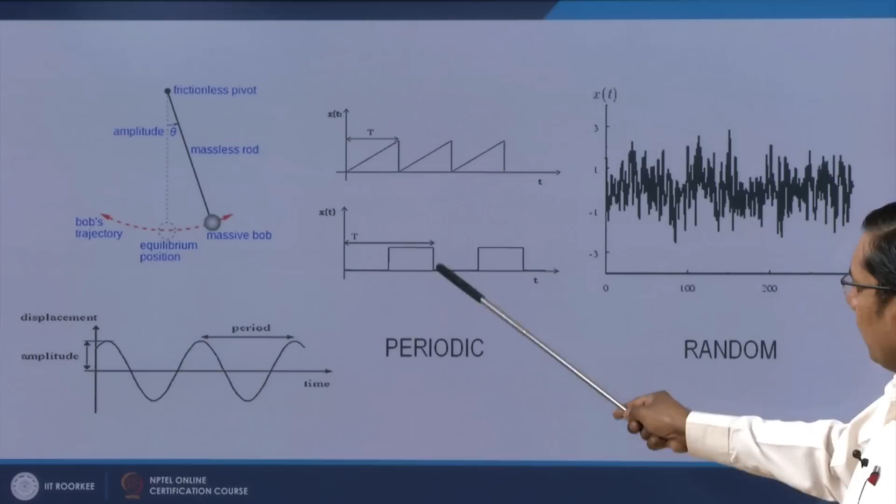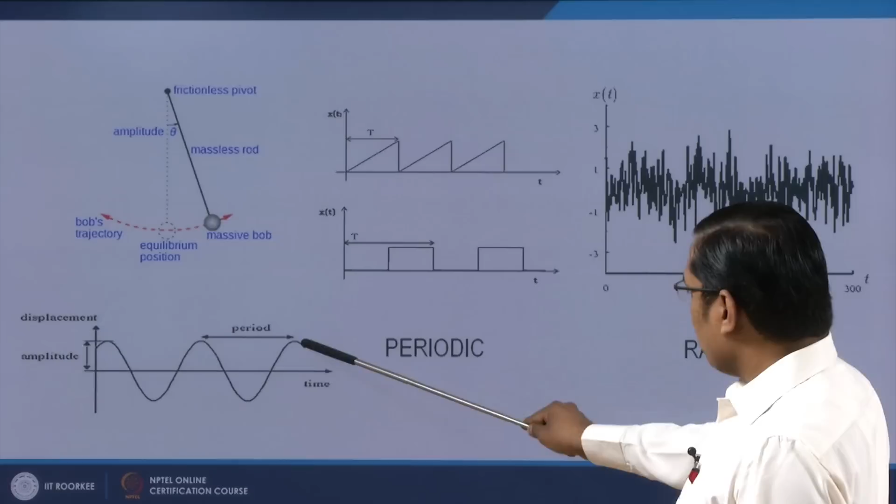Similarly, this motion repeats after a fixed time, so it is also periodic. Similarly, here we have a repetition of this wave profile, it repeats from here and then again starts repeating its motion. So these are periodic, but if you see this motion, there is no fixed time interval when it will repeat itself.

It is random motion. For example, there is wind forces, and therefore the vibration of a tower due to these wind forces. So these are random vibration signals.

Now the next question is, why does a mechanical system vibrate? Why is there vibration of mechanical systems? Why don't they stay static? As we know, every mechanical system has some mass and stiffness. Any system that has mass and stiffness is prone to vibrations.

Moreover, mechanical systems are subjected to external forces as well as forces generated inside the system. For example, if there is an internal combustion engine, there are unbalanced forces generated inside the system, and due to the effect of those forces, the system will vibrate.

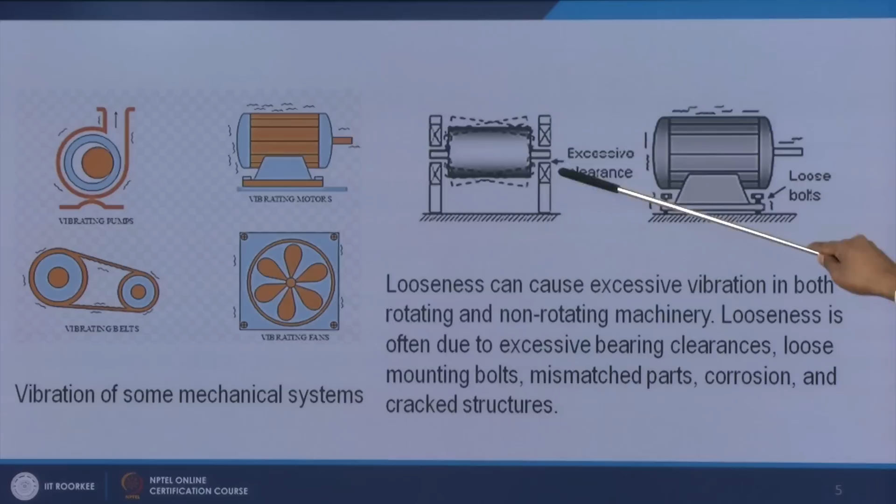In mechanical systems, there is some looseness because there are connections between members, and when there are weak or loose connections, that can be a cause of vibrations. For example, here we can see some clearance between the bearings and the shaft. If there is more clearance, or the bolts supporting this motor that connect it to the support are loose or have more clearance, there will be more vibrations.

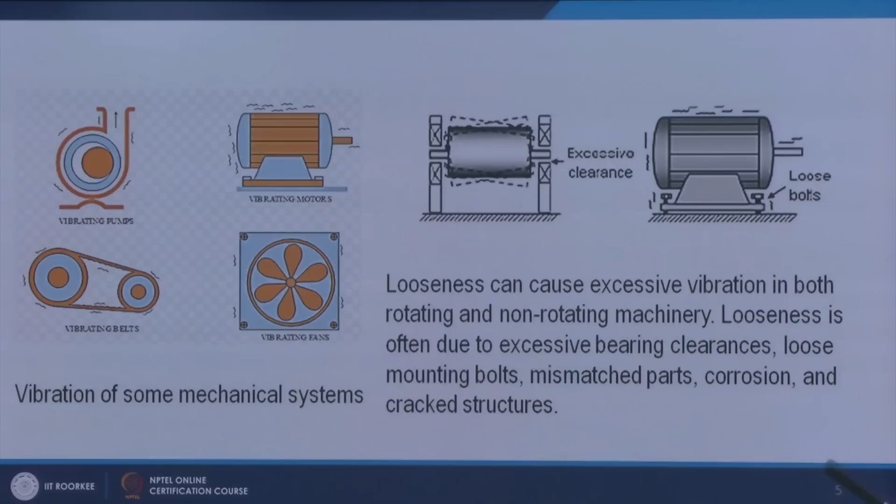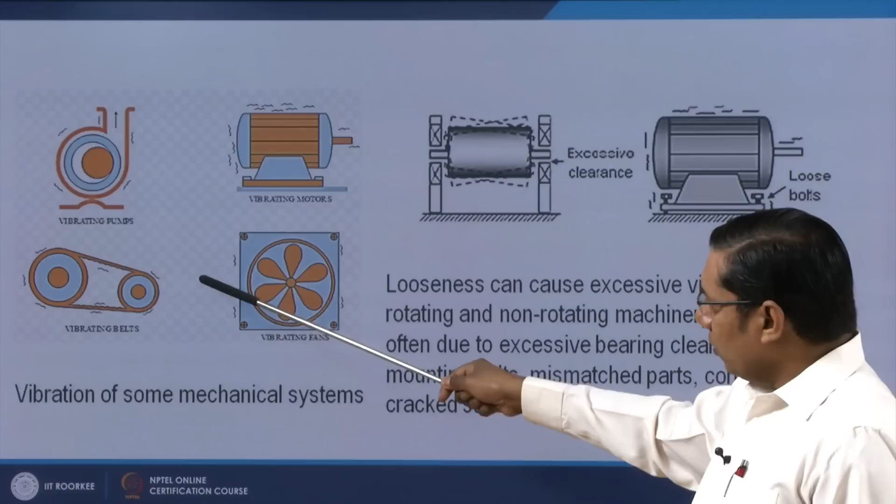And these are some mechanical systems like vibrating pumps, vibrating motors, the belt and pulley drive, then vibrating fans. So these rotary systems, they may have some eccentric masses, some unbalanced masses, and due to that unbalance, they may have some vibrations.

So what is the effect of vibration? Now we have defined vibration, we have defined the causes of vibration. Now we have to know what is the effect of vibration. The effect is positive or negative.

So in general, mechanical systems, in several applications, we avoid or we don't want vibrations. For example, if we are in a train, we are in automobiles, we are in a bus, we don't want vibrations because the vibration causes discomfort to the passengers.

If we have some turbines where there are blades and rotors, the vibration can cause fatigue and failure of the turbine blades, turbine rotors, components.

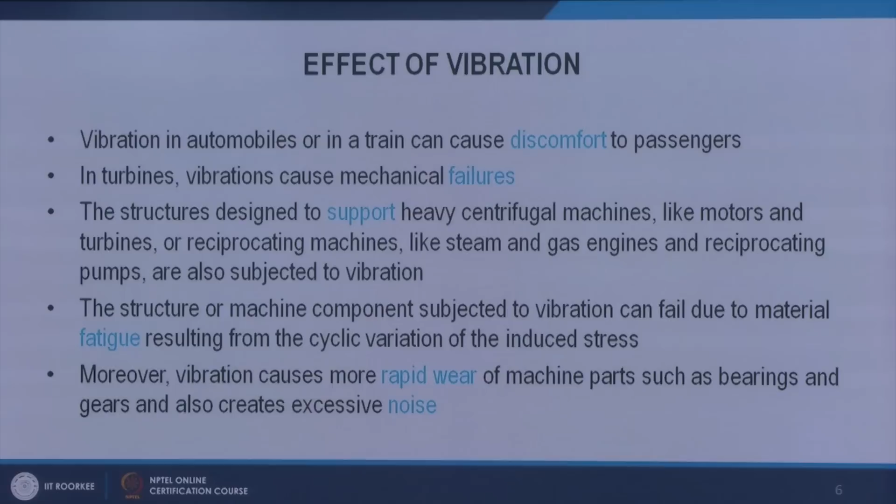Moreover, due to the vibration, there could be rapid wear of certain components like bearings and gears, and due to that there could be generation of noise also. So we can see that in mechanical systems usually we are avoiding vibration because vibration is going to have some harmful effects.

So we can see here a vibration can make the fasteners loose, and if there is some vibration in the machine, for example if it is a cutting lathe machine, the tool can chatter, and due to the vibration of the tool, we can't achieve the required surface finish on the product that is machined.

So here we can see two examples. One is this bridge that fell down, that collapsed, due to the wind excitations. As I said, structures or systems are subjected to wind loads, and due to that they can vibrate, and that vibration can lead... because the theory of vibration is very vast, you will understand that in certain conditions this vibration can lead to the failure of this bridge.

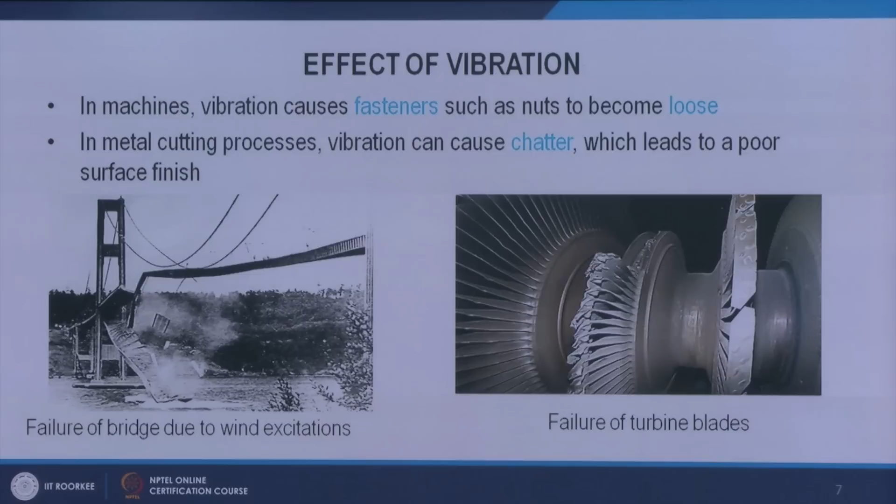And here in turbine blades, there could be the failure of turbine blades due to the fatigue that can be caused by the vibration.

So as a mechanical engineer, why should you study vibration? As we saw the examples, we find that the vibration in mechanical systems is undesirable. We don't want the vibrations.

And every mechanical system has some natural frequencies, and if the force that is applied on the system and the frequency of that force coincides with the natural frequency of the system, there is the resonance condition, and in this condition the vibration amplitude of the system is quite large and the system can break.

And as a mechanical engineer, we should study to avoid these circumstances in any machine, and therefore we should study the vibration.

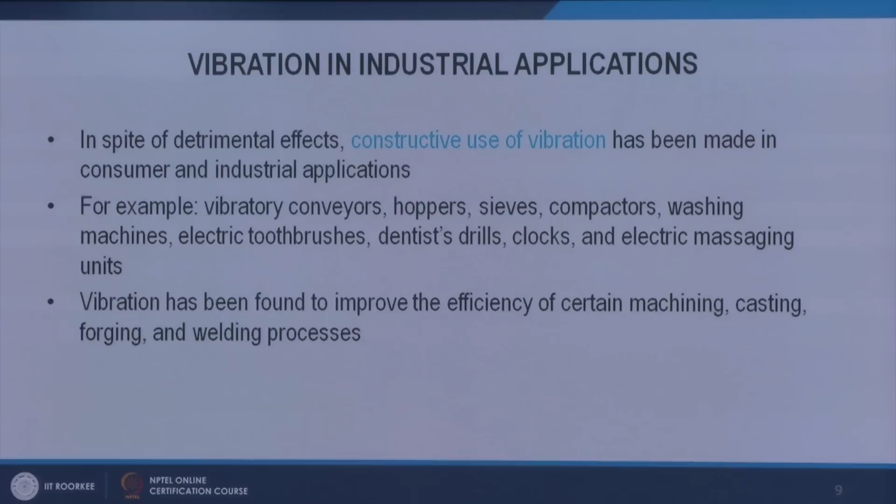Of course, vibration we saw is undesirable. However, the idea of vibration is used in a positive sense in some industrial applications. For example, if we have vibratory conveyors, hoppers, sieves, washing machines, they function using the concept of vibration.

Vibration can be used in some machining processes to improve the products, to improve the efficiency of the operation.

So we have studied some basics. Now again we come back to periodic motion, because we said that vibration is a repetitive motion and that repetition can be periodic or random. So again we come to periodic motion, and periodic motion is a motion that repeats itself after a fixed interval of time.

We can see that fixed interval is known as the time period, and the reciprocal of that is known as frequency, and frequency is the number of cycles per unit of time.

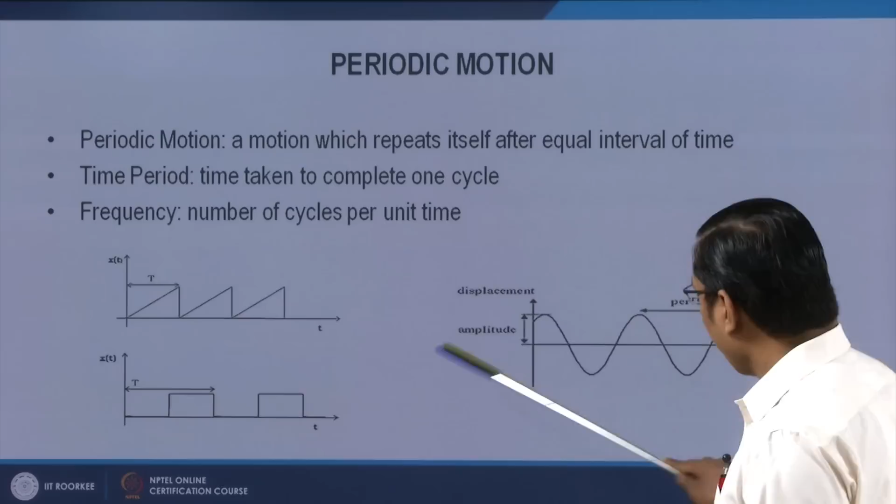So here we can see we have this time, this is the time period, because that motion is going to repeat itself after t. Here this is the time period because this complete motion is going to repeat itself, and here this is the time period because it is going to repeat itself.

Now we discuss a case of periodic motion, that is simple harmonic motion. Of course simple harmonic motion is a periodic motion also, because it also repeats itself after a fixed interval of time. However, there are some additional features.

That additional feature is that the acceleration is always proportional to the distance from the mean position, and it is always directed to the mean position.

So simple harmonic motion can be defined as the motion of the perpendicular on a diameter, when a particle is moving on a circle with a constant angular velocity. If we draw a perpendicular on a diameter and observe the motion of that perpendicular, that motion is simple harmonic motion.

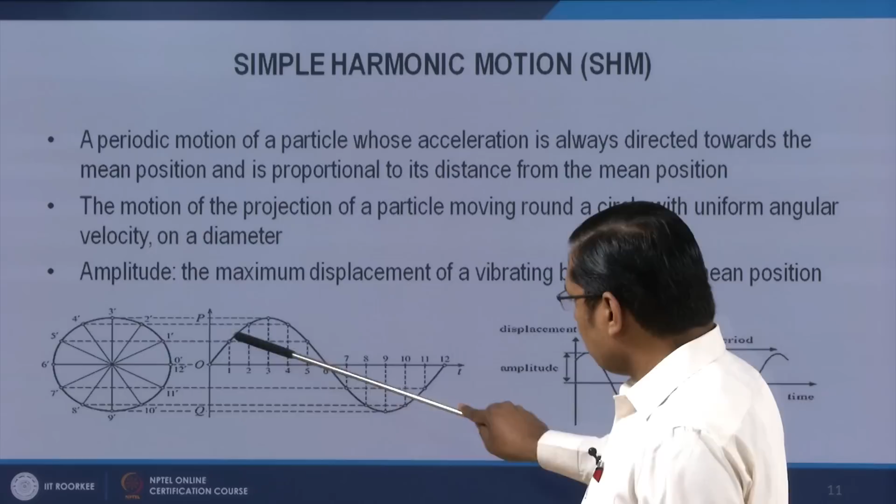For example, here we can see this is a simple harmonic motion, and that comes because here we have a particle. If it is moving on a circle, we draw a perpendicular here or here. So the perpendicular is moving in this way, and we can see this more clearly.

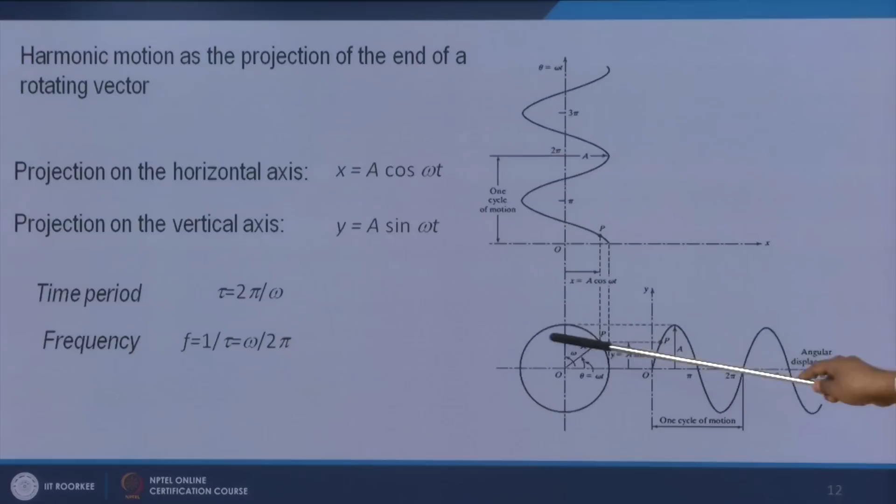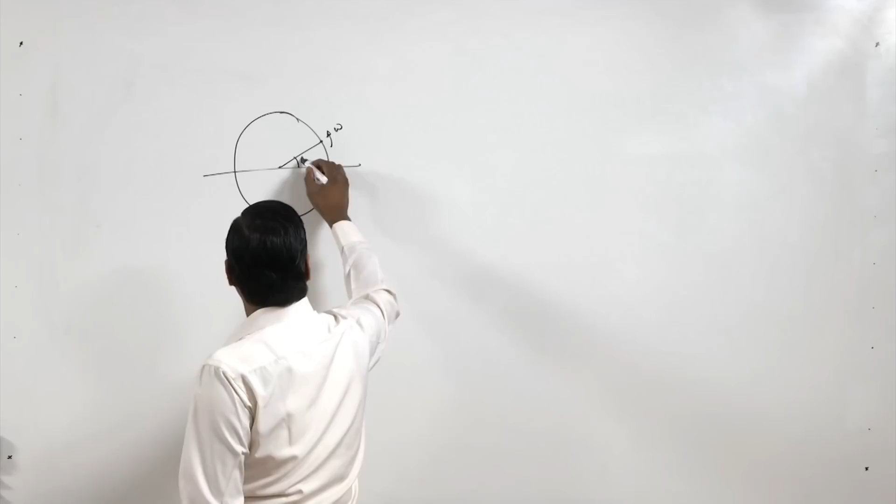So we have here the circle at point P that is moving here. If we draw, so we can have here a circle and a point P that is moving with omega as constant angular velocity, and this is theta equal to omega t, and this is t equal to 0. So if we draw a perpendicular here, this is O, this is A, this is B, this is N.

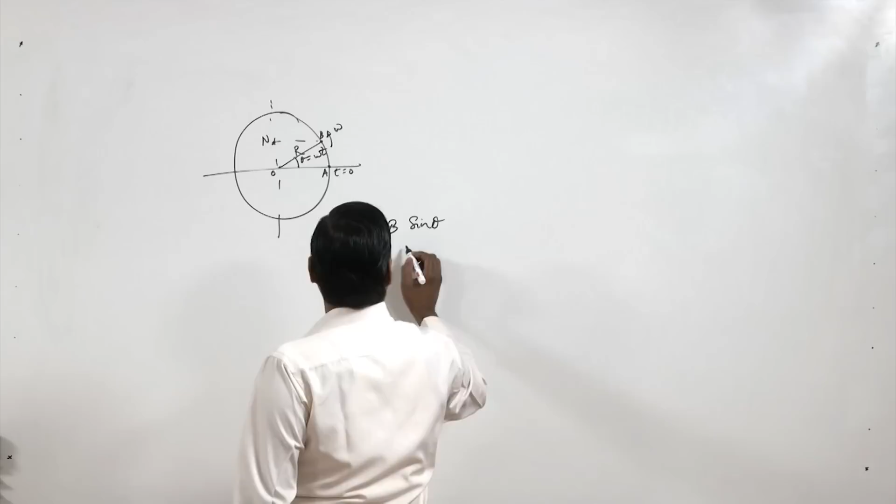So ON equal to OB sine theta. OB sine theta, and OB is the radius R, so that is R, and theta is omega t, so R sine omega t. And if we say this is Y, then Y equal to R sine omega t. And this is simple harmonic motion.

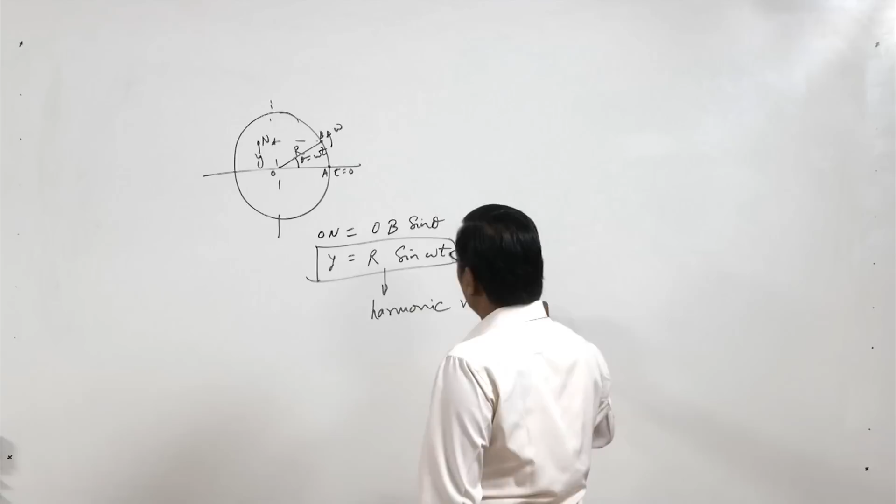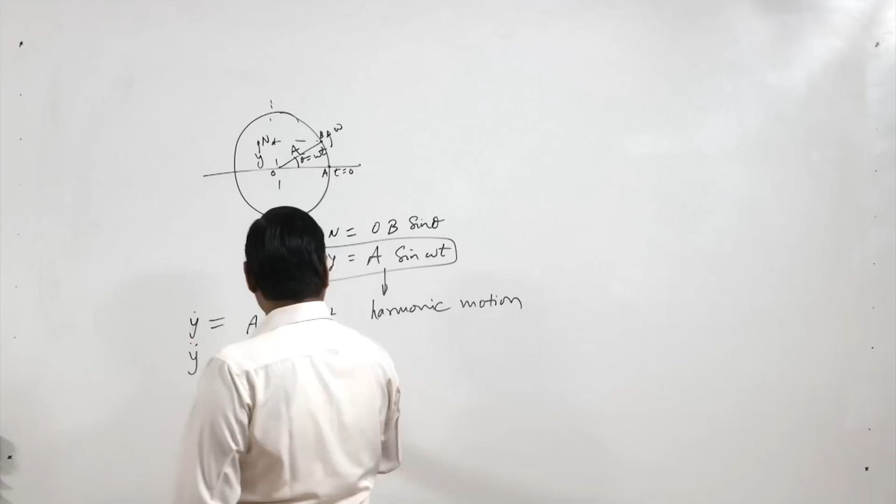So we can say if it is A, then A sine omega t. Now if we differentiate, y dot equals A omega into cos omega t, and y double dot equals minus A omega square sine omega t, which we can say equals minus omega square into A sine omega t, which is y.

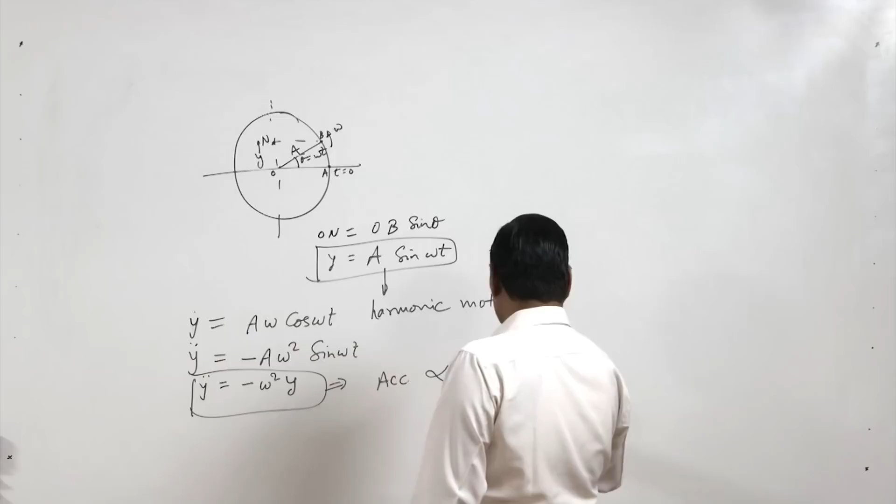So this is what the acceleration is: it is proportional to the displacement with a minus sign. That is the property of simple harmonic motion. So the time period is 2 pi by omega, and frequency is omega by 2 pi, where omega is the angular frequency.

Now we have degree of freedom. A system is said to have n degree of freedom if it needs n independent coordinates to completely specify its configuration at any instant of time.

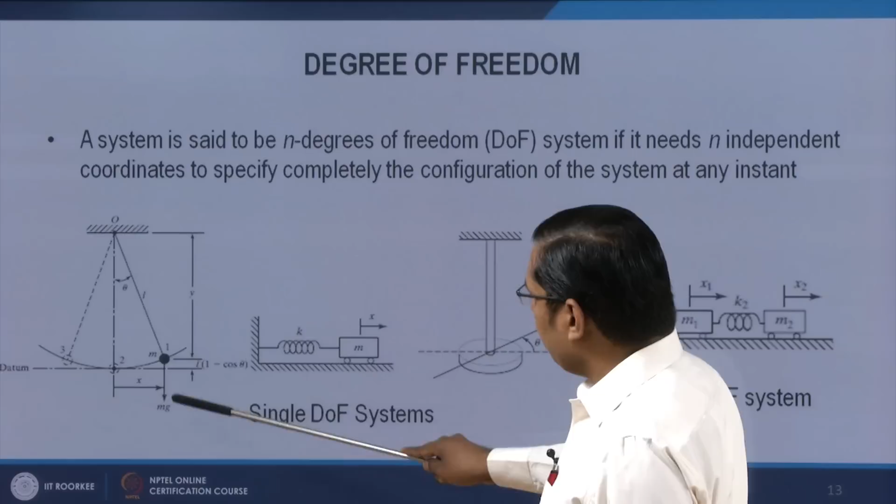For example, here we have this pendulum. Although this is x and this is y, they can be represented in terms of theta. So theta is the only degree of freedom

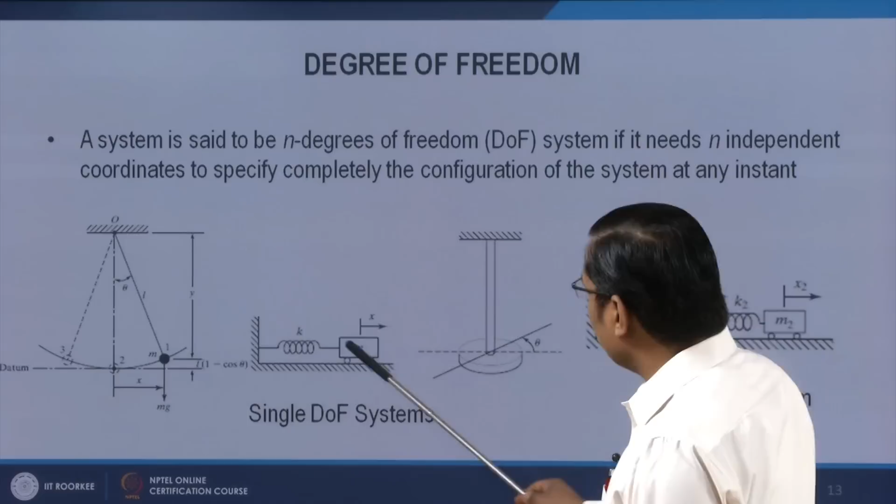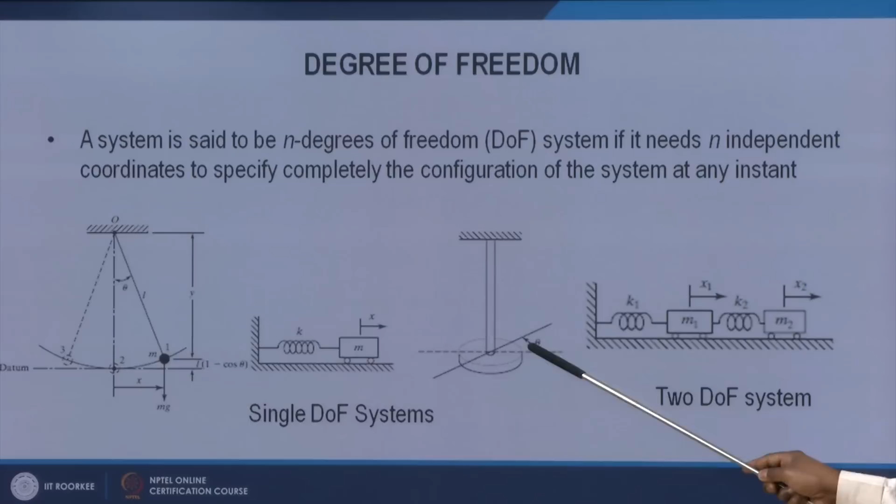that can express the position of this mass at any instant of time. This is a single degree of freedom system because the mass moves in the x direction. This is an angular degree of freedom because there is only rotation. Here we have 2 masses moving in the x direction, so each mass needs 1 degree of freedom. This is a 2 degree of freedom system - the system needs 2 degrees of freedom.

So, what are the elements of a vibrating system? As I said, a mechanical system is prone to vibration if it has mass and stiffness.

The function of mass is to store the kinetic energy, and the function of the spring is to store the potential energy. During vibration there is an exchange of these 2 energies.

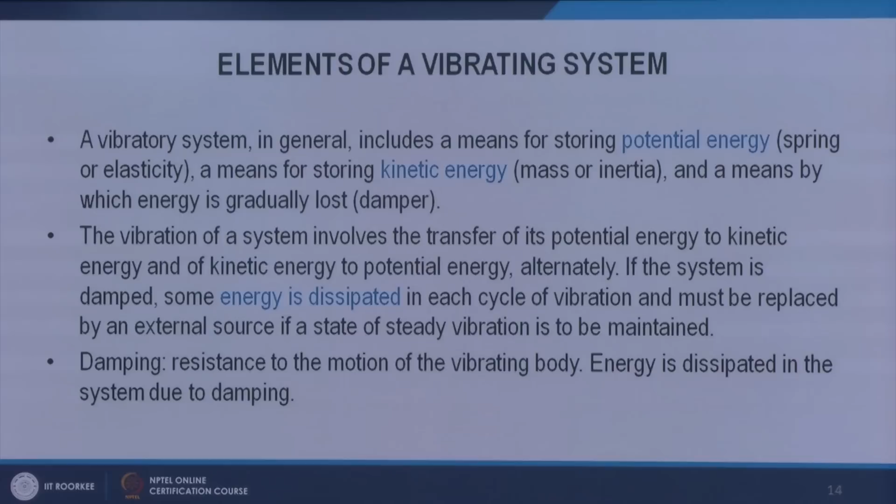However, there is another element called the damping element. The damping element dissipates the energy. So if a system wants to maintain its vibration, it needs some external force so that its vibration could be retained. Otherwise, due to the effect of damping, the vibration amplitude will decay with time. Damping is the resistance to the motion of the vibrating object, and it dissipates the energy. So there are basically 3 elements of a mechanical system: mass, stiffness or spring, and damper.

Vibration is classified into 2 types. Of course, classification can be made in several ways, but free vibration and forced vibration are the main classifications because they are different types of vibration.

What is free vibration? Free vibration means there is no force. If we disturb a system by pulling it a small amount and leave it, the system will start vibrating, and that is known as free vibration. The frequency of that vibration is the natural frequency of vibration.

However, if there is some external force applied on the system and the system is vibrating under the effect of that force, that is forced vibration. And in the long run, or in the steady state, the system will vibrate with the same frequency as the external force.

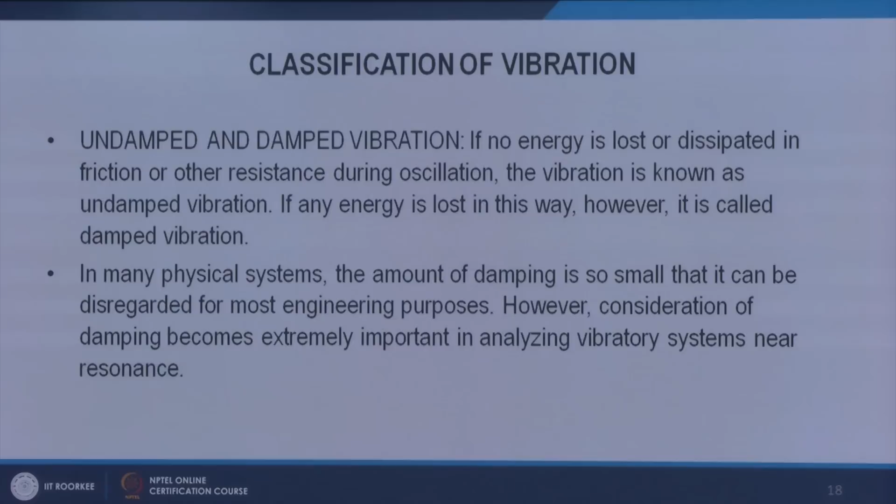As we said, at resonance condition the vibration of a system is very excessive. Therefore, to reduce that large amplitude vibration, we need damping to bring that amplitude into a lower range. So the role of damping is quite important.

Then there are linear and non-linear vibrations. Linear vibration means the behavior of dampers and springs is linear - they behave in a linear way, and the differential equation that is formed is a linear differential equation.

However, if stiffness is nonlinear or damping is nonlinear, the differential equations will be nonlinear differential equations, and these vibrations are termed nonlinear vibrations. In linear vibrations, the principle of superposition holds, and we can take advantage of that. Therefore, linear systems are simpler in analysis than nonlinear systems.